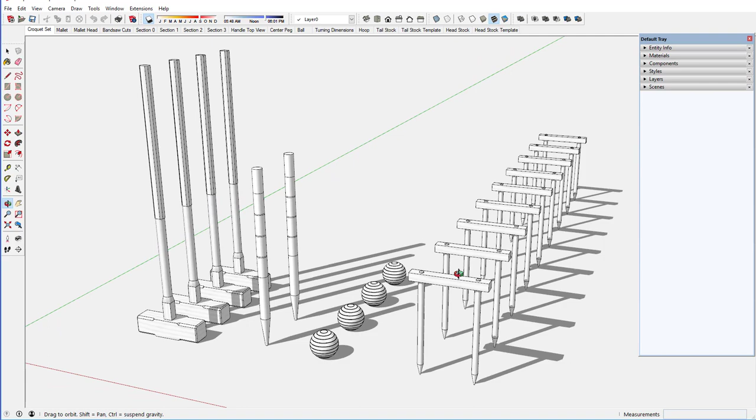Just recently I created this model of a croquet set. What drove me to do this was a family holiday this year where we were able to set up a game of croquet in a beautiful place, and it reminded me of childhood.

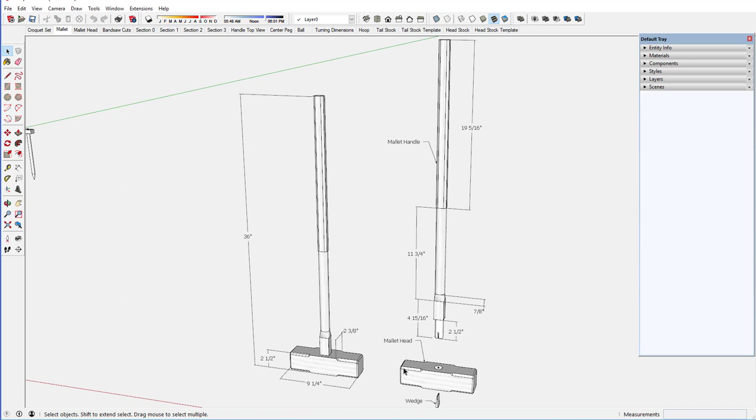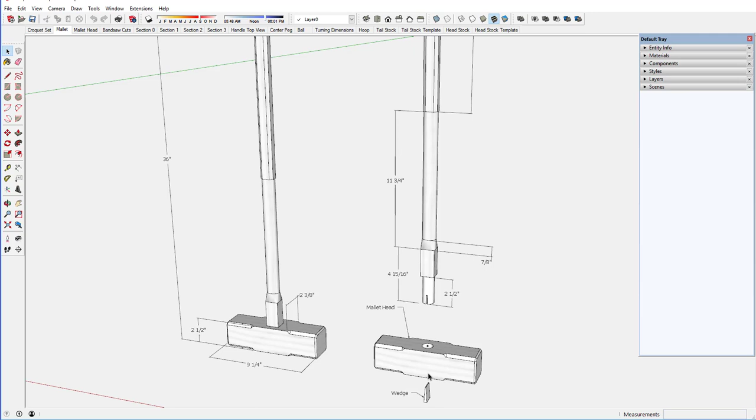And the many times we played this game in Ohio on the vast green lawns there. So I wanted to build a set, and I designed this around some of the professional equipment that I see. It's a heavy mallet, and I used local tree resources. This is live oak mallet head, and these dimensions are pretty much what you see in professional sets, with a 36-inch handle. The handle is ash from local trees here in California, and it's quite a heavy duty mallet, as you can see.

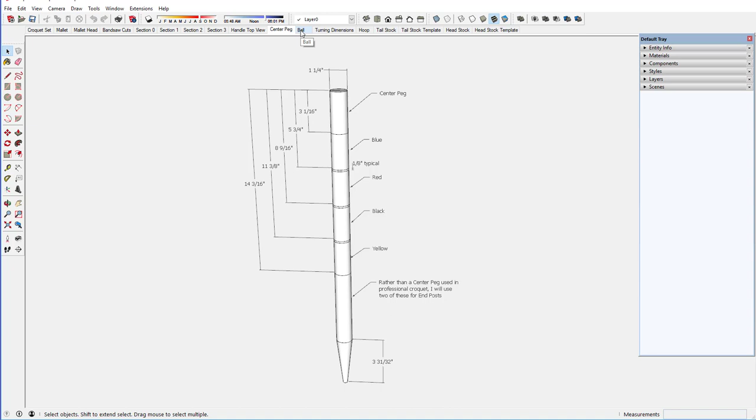Then you need the peg. In professional croquet there's just one center peg, but I need two of these because we'll be playing lawn croquet, and I haven't painted it here in SketchUp, but that's probably what I'll do.

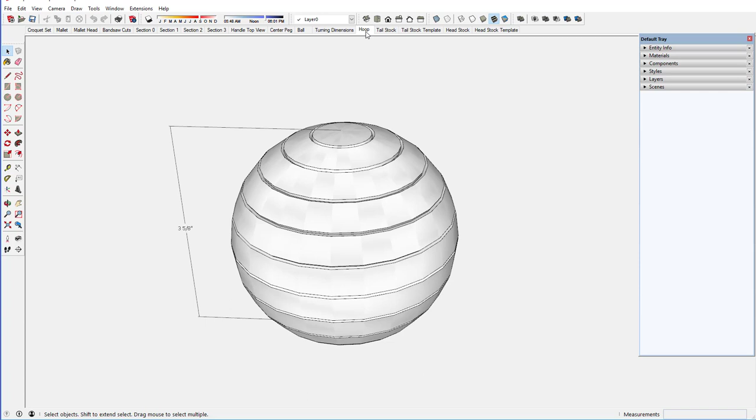And the ball, that's been the hardest thing for me to create on the lathe. I've built the set already, and the balls are a new thing for me on the lathe and challenging.

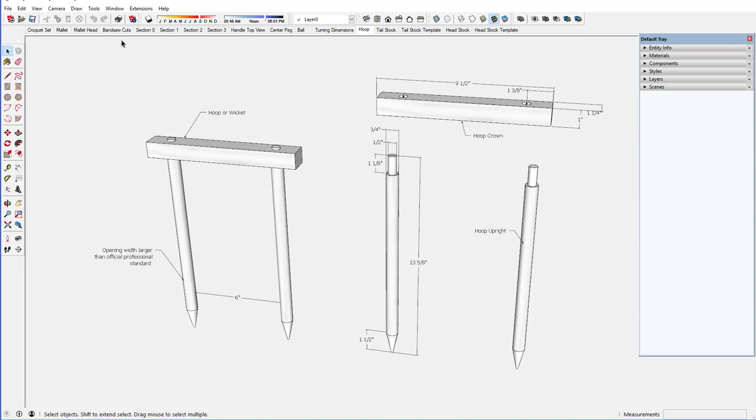Now, they call these hoops. We used to call them wickets in Ohio, where I grew up. In professional croquet, that opening is just a 1/16 of an inch over the size of the ball, but I made it 6 inches, which is kind of typical of garden croquet or lawn croquet.

Now, the modeling in SketchUp is quite simple, straightforward modeling, nothing fancy in here, although I did take advantage of some cross sections here, because this handle is not just a single cross section, it's several different cross sections. So I want to show you how I used the cross section tool.

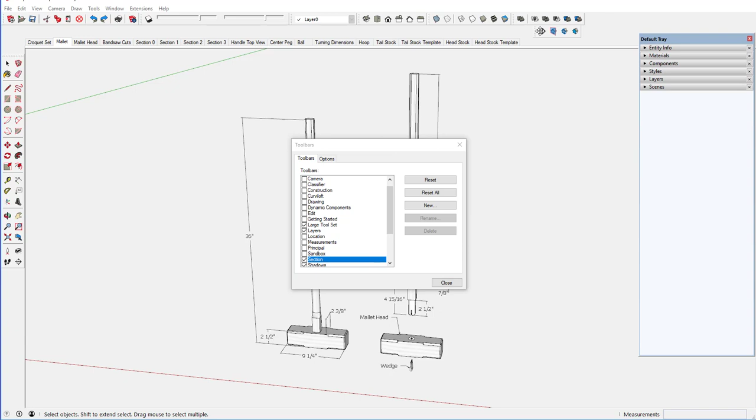I'm going to go and add a tool set, the section tool set. So I click on that section, and then it brings up this little tool set up here, and that's handy. And I can turn on the section planes by clicking that little icon.

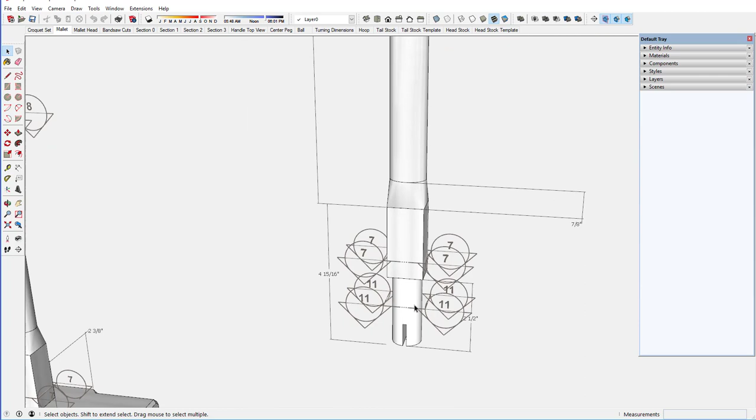And then that shows the multiple section planes that I've installed. There's one down here on the round tenon, and then there's the rectangular section, and then up above is an oval section, and then there's a chamfered section at the top.

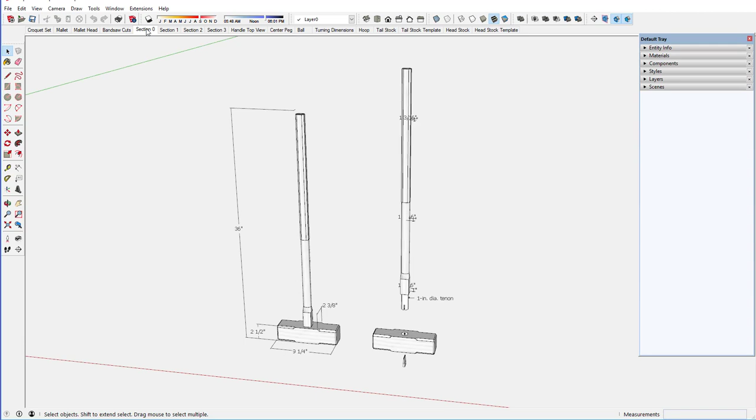Now, what I've done here then is to show the actual section cuts so that it's easy to tell what it looks like at each of those points.

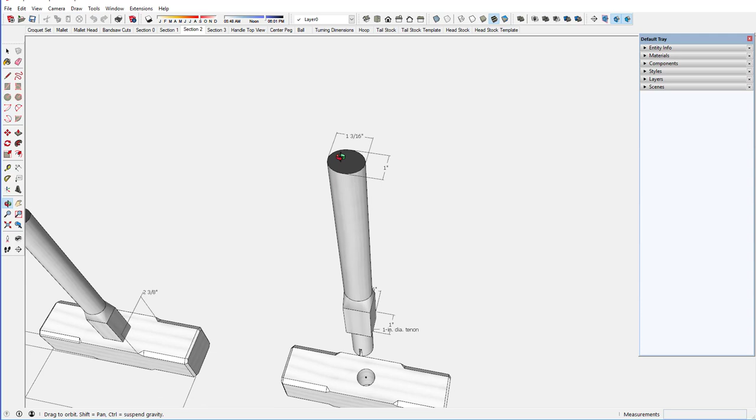So there's the rectangular section, it's a short section, and then there's this oblong elliptical section. Notice that that's a 1 3/16, that long length there along the longitude of the mallet, and it's strong where it needs to have strength, and then the upper section, which is chamfered.

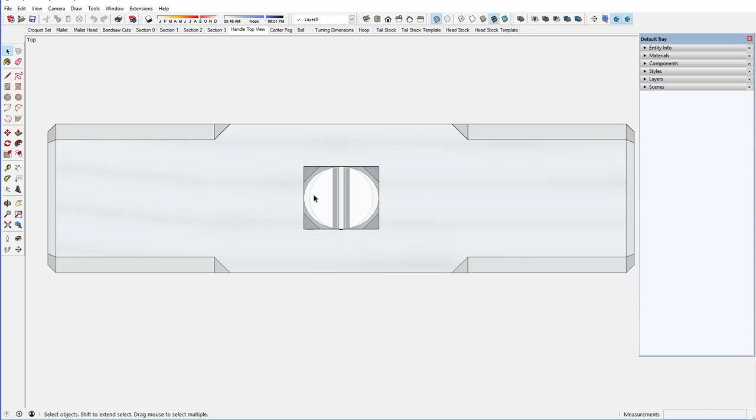So with the section cut ability, here's just a top parallel view that you can view in X-ray so you can see all those different cross sections in the handle.

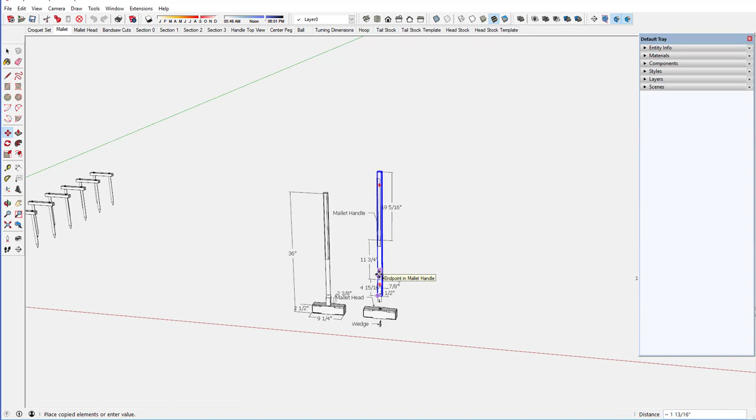But by combining the cross section with scenes, then you can have that transition. And let me show you how I just set up these different cross sections. I'll just copy over the handle to an open place in the model over here in the red axis.

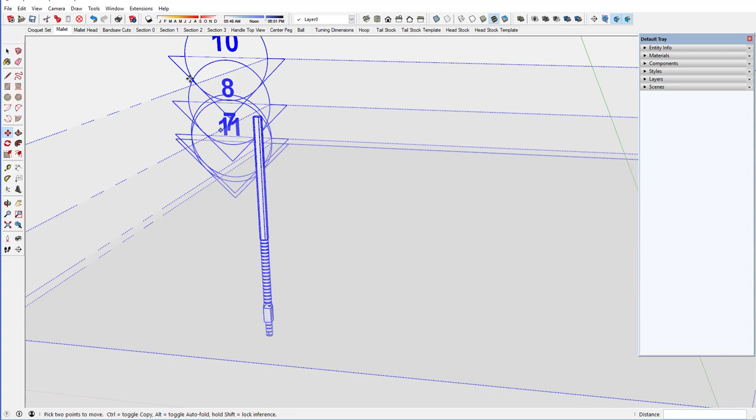And I probably, if I'm going to mess with this, I need to make that a... well, no, I don't want to explode that. I want to just make it a unique component so it doesn't mess up the other component that I've got in the model.

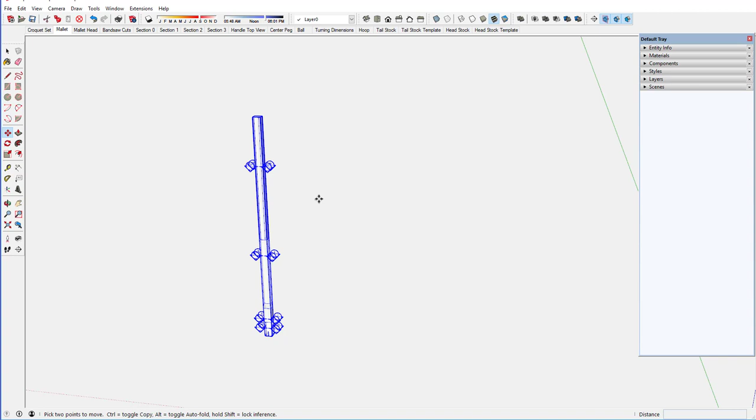So I can now edit that component and click on that icon, and it shows all the existing section planes that are within the component definition. So I had to open the component for editing, which I'm doing now, to place them, and then I can click on those section planes.

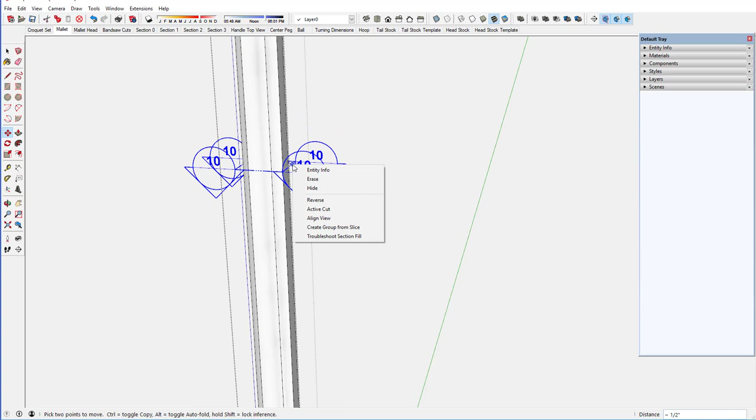I can move them around with a move tool, and I can also right click on that, and I have some options here, like for example erase. I can erase that section plane.

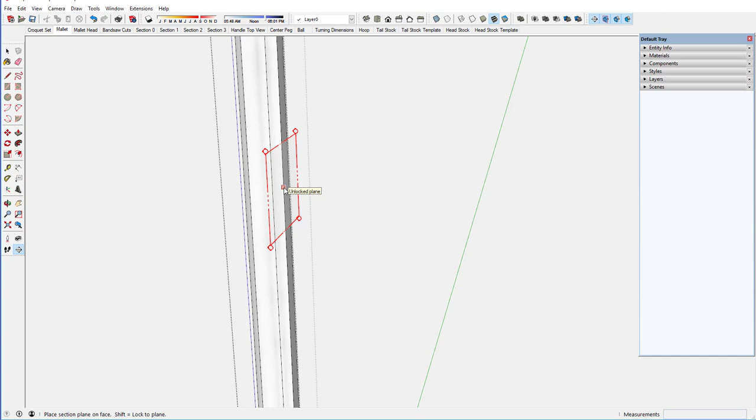To add a section plane, you click on that icon in the tool set, and it tries to number it, and then it wants to know what plane. I'm going to hit the upper arrow key to put it on the blue, and there it is, a new section plane, and it shows the cut.

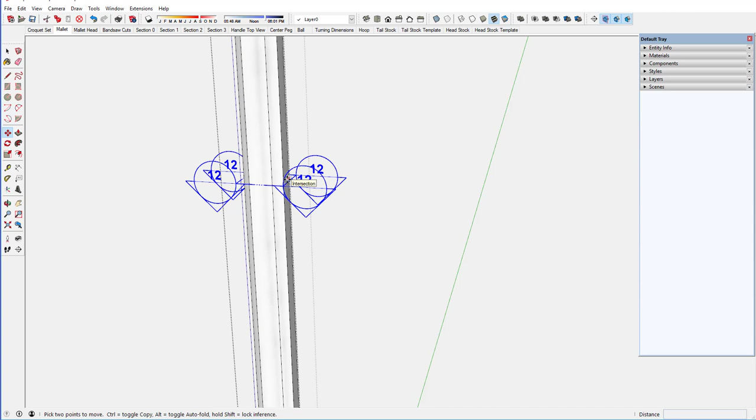I can turn that active cut off and just show the plane, or I can show the cut itself by right-clicking and clicking on active cut.

Now if I want to have a scene that shows that, then I can make a new scene, and I'll call it test scene for section cut.

So now I've got a new scene. I update that scene, and whenever I show that scene, then it will show the active cut.

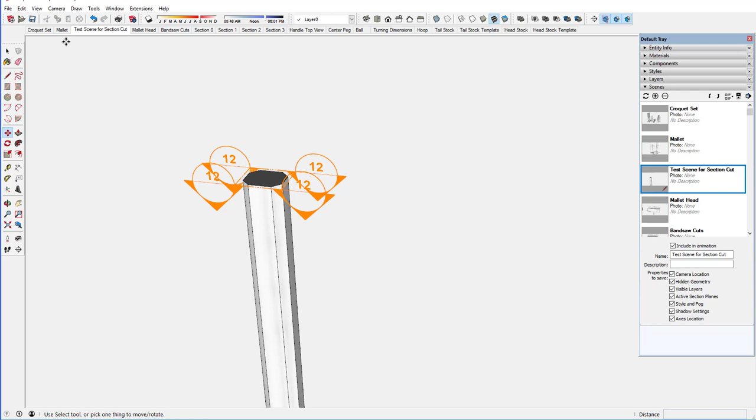So if I go back to the original mallet picture and then I come back to that new scene, I should see the section cut, and there it is. So that's how you can manage these to show the different areas of a component like I've shown here.

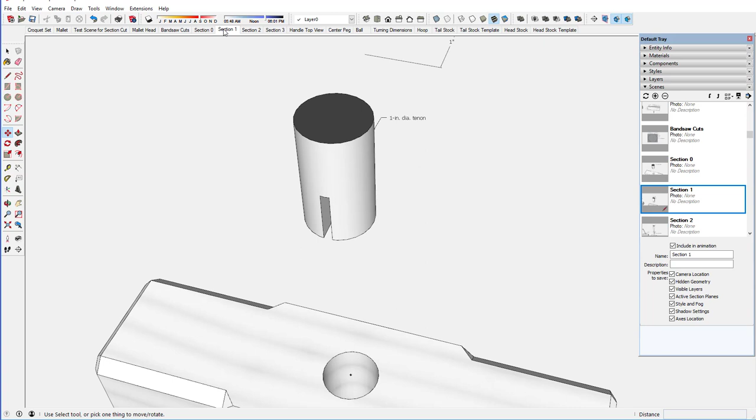And if you put the scenes together like this, you can kind of show how it all goes together.

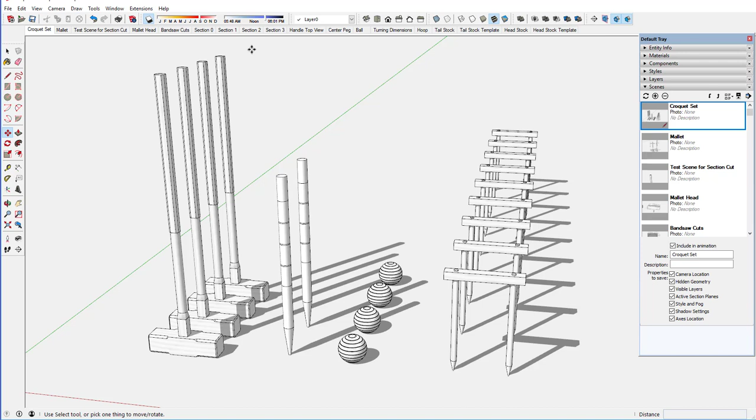So that's a croquet set, and I've pretty much built it. I'm ready now to test it on a green lawn, which is hard to find in California.